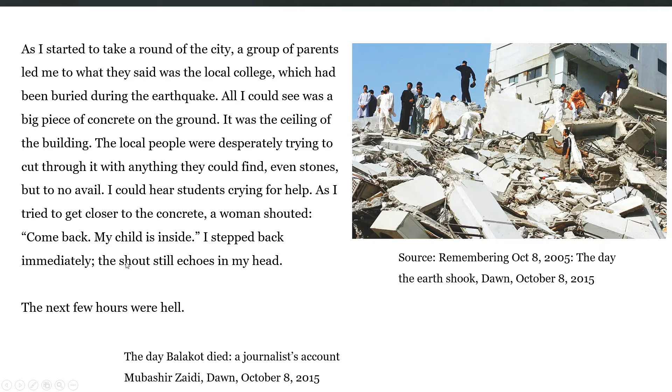So considering this background of this overall scheme, let me show you some of the basic things which we can discuss later, and I'll address them one by one.

This picture is taken from the mainstream media, and this is a typical picture of the Kashmir earthquake damage caused by the 2005 Kashmir earthquake. These are pieces of concrete which the local journalists were mentioning—basically reinforced concrete slabs supported on unreinforced masonry. They just collapsed, and many occupants, kids, and other people were buried under them. We had significant social loss just because of this unfortunate building stock we had at that time.

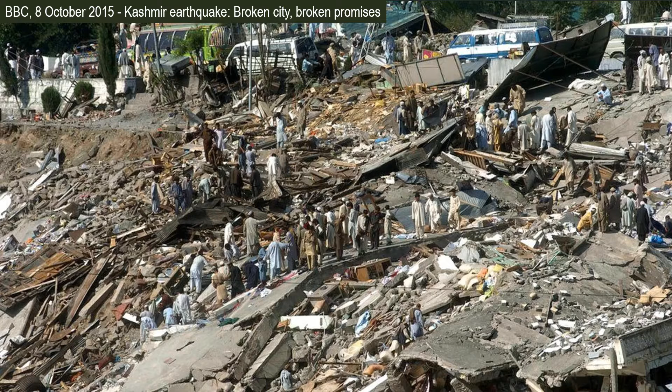I'll discuss the current situation later, but this is what we had at that time. Most of the buildings were unreinforced masonry, and the heavy roof on top of them was the basic reason, along with out-of-plane collapse of masonry infill walls, identified by several reports and research outputs after that. Let's start this whole story with a bigger picture.

I think we are all familiar with this global seismic hazard map, originally developed by GSHAP. Although it is an old version, I wanted to keep it here because it tells us that we unfortunately are one of the countries lying on the boundary of two interacting plates—in fact three in the case of Pakistan: Eurasian, Indian, and Arabian plate. We lie in those areas shown here by the red color, meaning they have a high hazard for future earthquakes.

So you can compare some numbers by looking at these visuals, but I just wanted to give an overview of the level of hazard we have. There are very few countries which have a higher seismic hazard than us. Very few countries. So we are in one of the most seismically vulnerable areas.

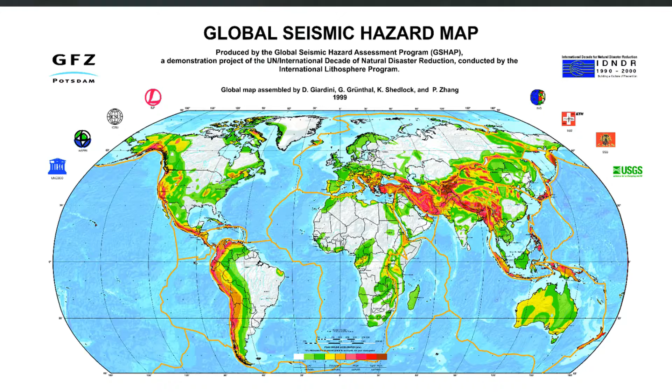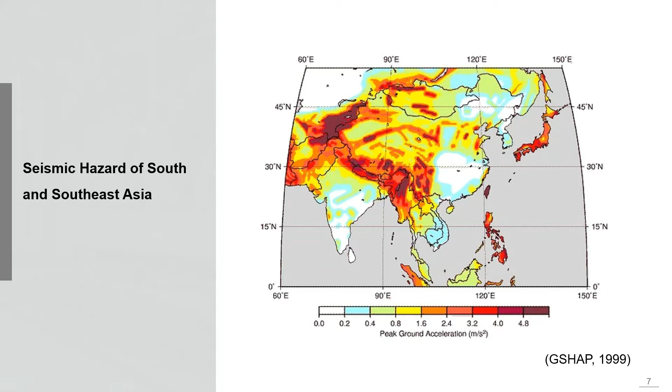Similarly, another map presents the seismic hazard for the whole of Southeast Asia, and we can see the numbers in terms of peak ground acceleration are also visible. So we are in areas which are highly susceptible to future earthquakes. These kind of hazard studies globally give us an indication of where we actually stand in terms of the level and probability of future earthquakes in Pakistan.

Now let's relate that high hazard—I will discuss hazard-related issues later also—but I just want to quickly relate it to the existing building stock in Pakistan. According to a relatively recent study from 2010, the current number may not vary that much: 93% of the existing building stock in Pakistan is unreinforced masonry. They are non-engineered. 93%—it is a huge number. Compared to some other countries, we have the highest percentage of unreinforced masonry.

We have the traditional burnt brick masonry, which is very weak in the out-of-plane direction, and we still keep on using it. Most of our building stock is made from this kind of weak structural system in the out-of-plane direction. So this is something we should focus on directly. All the efforts, all the research outputs, all the policy making should directly focus on unreinforced masonry. This is the very first starting point.

Whatever you are doing in the field of reinforced concrete or in the area of steel structures, for example, they may only be addressing 7-8% of the total building stock. So we have to come up with a national policy or national action plan to improve the seismic safety of this 93% unreinforced masonry.

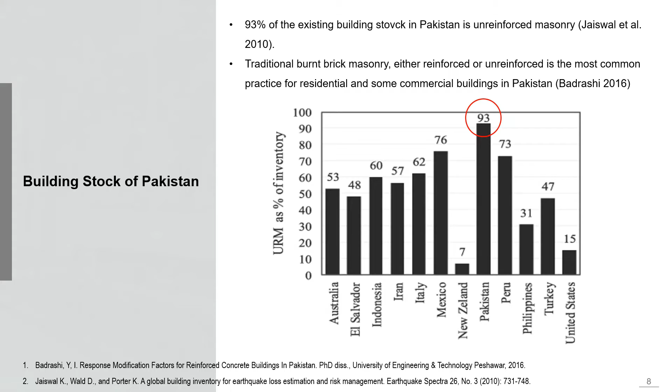We already know that this conventional masonry system used in Pakistan, and used by some other developing countries as well, consists of burnt bricks laid with loose or weak mortar joints, where the out-of-plane stiffness is almost zero and out-of-plane strength is also almost zero. We know this conventional system has several issues. It is the first type of structure which collapses as a result of an earthquake. It is very weak in the out-of-plane direction. It is unable to dissipate seismic energy, and if it is not confined or anchored properly, it may suffer out-of-plane collapse.

It also offers some advantages, but it also has significant disadvantages. We know that it is low cost, and this is the reason why we still keep on using it, even knowing some of the issues related to that. It may provide some better insulation compared to other low-cost systems, but we may develop improved masonry systems, and I will discuss one potential candidate for this.

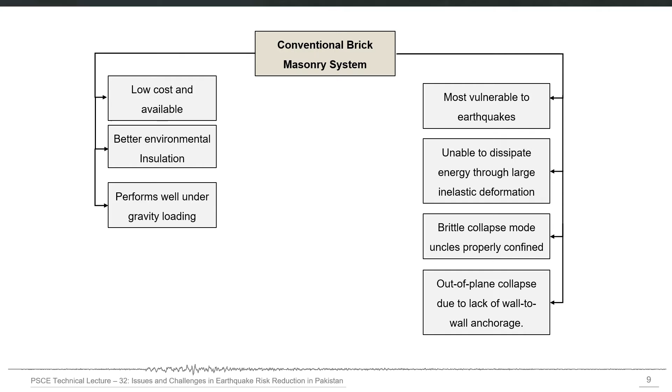It may also perform well under gravity loading, but this is not our concern right now. We will be focusing mainly on lateral loading, and in lateral loading this kind of system is very weak. The burnt bricks are very heavy, and therefore they may cause significant social loss also, apart from the economic loss.

So if we look at the historical pattern of earthquakes and the damage they have caused, we have to rephrase our question. On the left, we have Balakot city after the 2005 Kashmir earthquake, and I keep on using these pictures in all of the presentations and seminars because they give a very clear indication of what actually the condition is.

On the left, we have Balakot after the 2005 Kashmir earthquake, and we can see that the whole city is completely leveled. We can see all those big pieces of concrete, as the local journalist experienced or explained at that time. But basically, they are reinforced concrete slabs which just collapsed because of the collapse of supporting masonry. On the right, we have a close-up picture of one of the collapsed houses.

The person in the yellow or orange, this house is basically his own house, and this picture was taken one month after the Kashmir 2005 earthquake. The message I want to give you here is that once the earthquake occurs, it becomes the permanent part of the lives of those people. So he is just sitting on top of the rubble of his own house, and he is forced to carry out his day-to-day routine and resume his life after the earthquake.

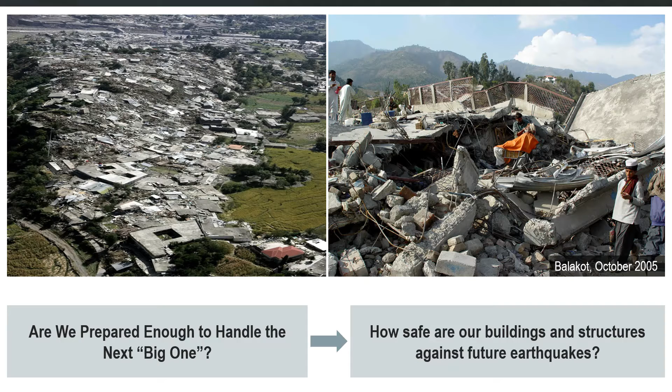So if we have more safe infrastructural facilities, we may develop preparedness and loss mitigation also. Just to give you a recent example, I want to make the point that even a relatively low magnitude earthquake may cause significant damage in our local scenario, considering the quality of construction and other issues in our construction industries.

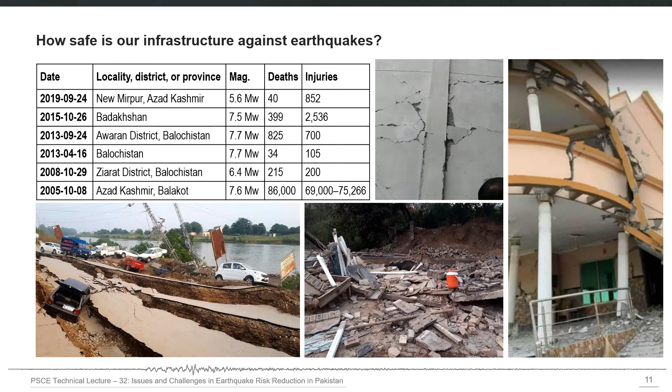So from now onwards, if we talk about earthquake resilience in Pakistan, I will be discussing just four areas, and I will try to cover some of the aspects and issues in these four areas. The first area, which is my own area, is research and academics. Second is about the enforcement mechanism of different building codes, and in fact the development of building codes. The third is the capacity building of current structural engineers and designers in order to equip them for the latest technological advancements occurring around the globe.

And last is very important, and that is about public education and awareness, the role of digital media in actually disseminating some of the information which is required right at the grassroots level.

So let me start with the first area where we may need efforts in achieving seismic resilience or earthquake resilience, and that is research and academics. I can identify two main categories of issues.

One is the accurate characterization of seismic hazard. First, we need to know how much hazard we have in our region, and that will result in a realistic seismic loading which we can apply and design our structures to.

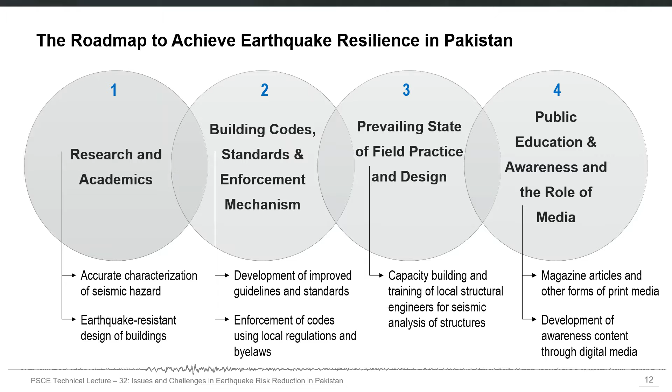The second area is about the earthquake resistant design of buildings and some of the advancements which the world has already made, and we still have to make.

So some of the challenges in research and academics are related to seismic hazard assessment. We know that we can divide the earthquake problem into two broad categories: the structure side and the loading side.

On the structure side, what we know is that we have to construct a linear or nonlinear analysis model, which is a reasonable compromise between a real structure and its mathematical representation.

On the loading side, we have to come up with some characterization of seismic loading, seismic ground motions. Either in the form of time history, acceleration time history, or in the form of a design spectrum. Since it is currently not possible to predict a future earthquake, we have a probabilistic science behind that.

This gives us an approximate characterization of future ground shaking. It contains a detailed process of seismic hazard assessment, and then the site response analysis in order to quantify the amplification effect of different local soils.

Considering this overall story, I can identify issues in four areas: accurate characterization of seismic hazard, site soil characteristics, structural modeling in the local context, and lastly, seismic analysis and earthquake resistant design, including evaluation of existing buildings and design of new buildings.

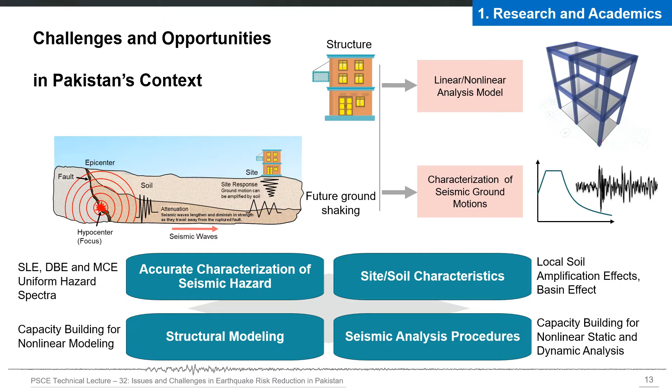In the first area, accurate characterization of seismic hazard, the very first issue is a reliable, complete, and comprehensive earthquake catalog for Pakistan. Several attempts have been made, and one comprehensive attempt is still being made.

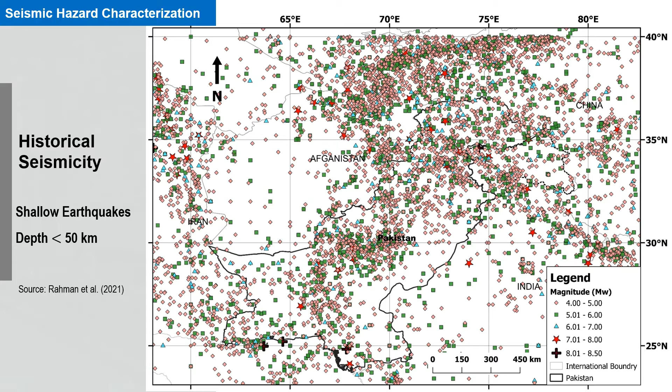We can see that most of the shallow earthquakes are spread along the main plate boundary, dividing the country into two halves. Some shallow earthquakes are also concentrated in the northern Hindu Kush region. If we talk about deep earthquakes, they are mostly concentrated in the Hindu Kush region.

We have often heard news from the media about large magnitude earthquakes greater than 7 or 6.5, which may affect the seismic hazard within the administrative boundary of Pakistan. You can see some star symbols here on the northern side in the Hindu Kush region, and they are all earthquakes with magnitude greater than 7.

Even some very deep earthquakes having magnitude greater than 8 were experienced in the last 100 years. So the very first issue is to come up with a complete and reliable earthquake catalog which can be used as a basis for future seismic hazard assessments.

Hazard assessment is an approximate science, and therefore we need to update it after every few years as more data becomes available, and as new methodologies and analysis procedures are available. So we must have a reliable seismic source characterization model for Pakistan.

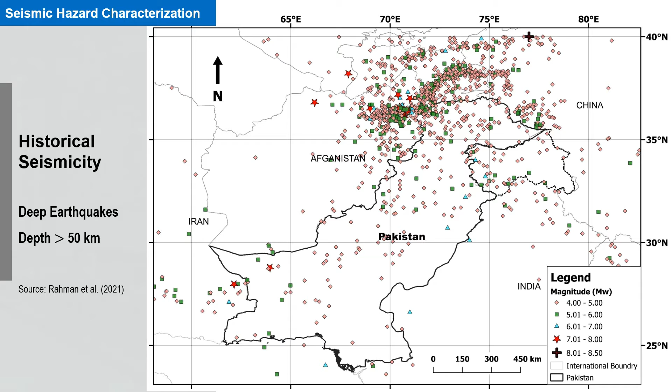A unified attempt is being made, and this study is also part of that attempt. The second issue I can highlight is the crustal fault database, or the crustal fault seismic source model for Pakistan. Currently, we don't have a unified study or database for all the crustal faults of Pakistan. Many of the crustal faults are unnamed.

Some of the data is available in terms of slip rates and basic geometry of those faults, but most of them, their slip rates are not available, and there may be several of them which are not even identified or discovered yet.

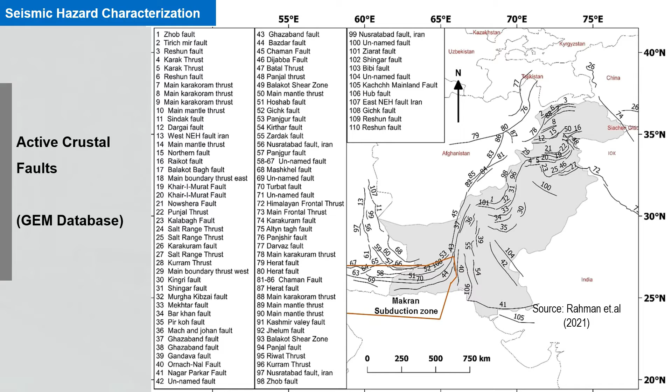Currently we are working with the Geological Survey of Pakistan and Pakistan Meteorological Department to come up with a more accurate and reliable fault source characterization model that will be used as a basis for a better seismic hazard assessment in future.

Another issue which I can identify in the seismic hazard of Pakistan, and some of the attempts made in this area, is the development of risk targeted ground motions.

From 2009 onwards, the International Building Code and American Society of Civil Engineers 7-10 document moved on to a new definition of seismic hazard: once you have the MCE level ground motions, you have to modify them based on the risk coefficient at each pixel, and modify the whole study area, finally coming up with a map based on a target risk.

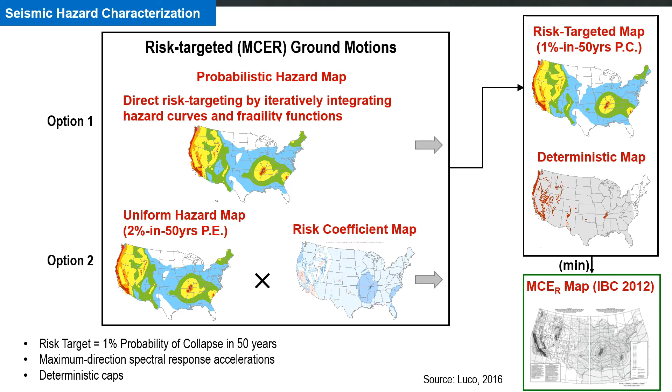So this is something which we should consider in future, and this is something which should be our next target: to develop a risk targeted ground motion dataset for Pakistan.

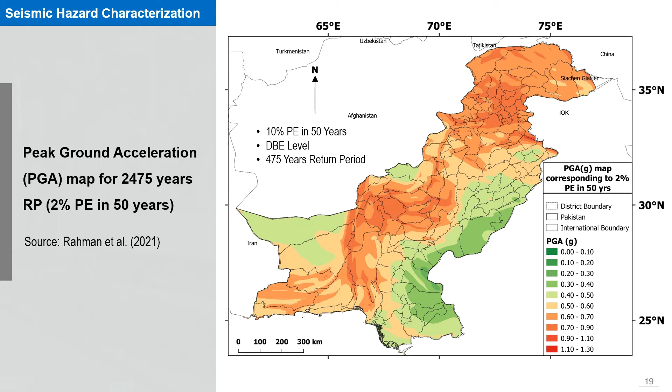But as I have mentioned earlier, even the global earthquake model database still misses some of the important faults which should be considered, mostly on the northeast side. So therefore, there is still room for improvement, and we will keep on improving our seismic source database, and finally keep on improving the hazard calculations.

This is the spectral acceleration maps for different return periods. On the left hand side, we have the short period spectral acceleration, also known as SS, for the DBE level, design basis earthquake. On the right hand side, we have the MCE level. And the numbers correspond to the hazard, which is higher than what we had in the 2007 building code of Pakistan.

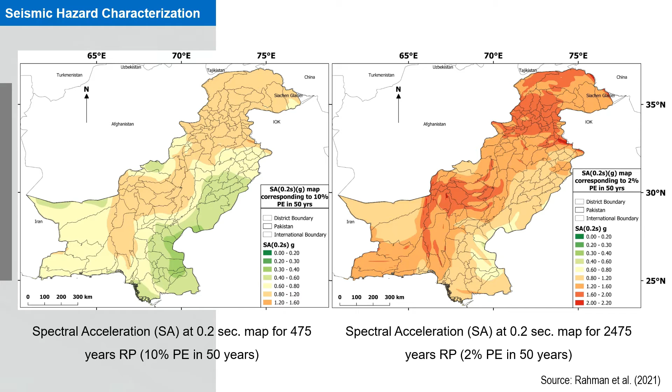But the effort is still going on, and we are currently improving that source model to have a very clear picture of the seismic hazard.

Another related area I want to highlight is the seismic monitoring network, the current status in Pakistan. I'll give you an example, comparing Pakistan with another country. The reason I've taken Taiwan is that it's a very small country with an area of 36,000 square kilometers, compared to Pakistan's 881,000. The whole population of Taiwan may be less than one megacity like Karachi in Pakistan.

The reason I've compared both these countries is that their design hazard level in terms of peak ground acceleration is very close. The maximum hazard, as indicated by the national seismic hazard maps for Pakistan - the current one, unless we replace it this year, but if we talk about the 2007 one - is 0.32 G, the maximum PGA, classified following the UBC methodology as zone 4. In Taiwan, we have 0.35 G.

But all these dots on both maps, the triangular dots, show the seismic stations. On the left, we have the seismic station network by the Pakistan Meteorological Department. On the right, we have the same thing in Taiwan. You can clearly see, if you compare the scale, you can't even count those red dots - each one is a seismic monitoring station. But on the left, we can count - although having a great area and a huge population, we may have maybe 20 to 30 maximum.

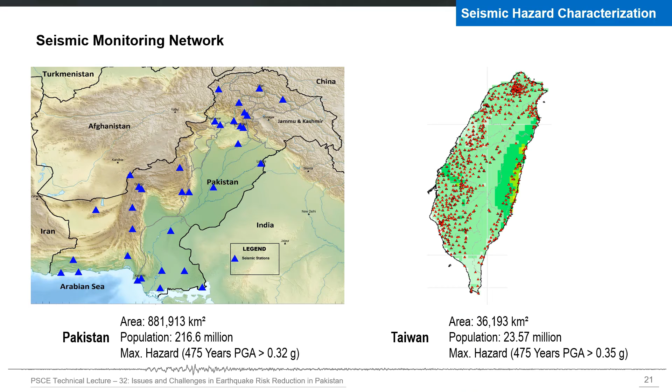Similarly, another area in the same overall theme is the liquefaction potential of some of the sites in Pakistan. And if not liquefaction potential, then maybe the amplification offered by some sites due to local soil conditions. In this particular example, I show some of the areas, especially in the Sindh region, the coastal belt. There may be several sites which are susceptible to liquefaction.

Also, some recent studies have shown that even soil classes which are considered good, like soil class D, may offer an amplification of more than 2 times when you compare the bedrock level hazard with the surface level hazard. So several site response analysis results are indicating that we may have a high level of amplification for some of the local soils.

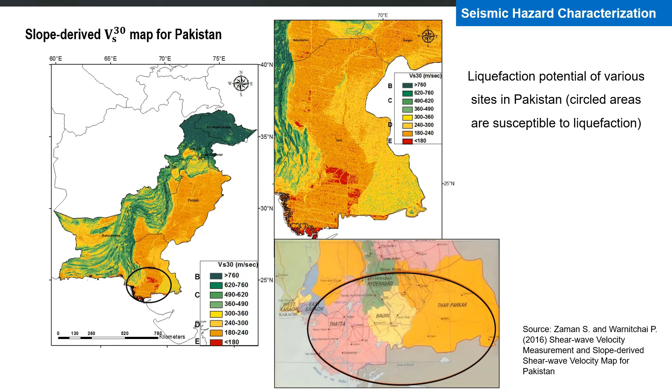Now let's move on to the second side of the whole story, and that is the structural side. I'll be discussing some of the issues in structural modeling and seismic analysis of structures in Pakistan. We know the evolution of seismic design approaches started when we shifted from intuitive design to code-based design, and then there was a whole era of different code-based procedures and prescriptive design provisions.

But then in the late 90s, we know that performance-based design emerged, and now it's fully developed into a state-of-the-art new seismic design philosophy. Currently, it's being widely adopted in some developed countries, but the world has moved on and also developed several other new seismic design philosophies, including consequence and risk-based design, and finally resilience-based design.

Because in these latest two approaches, you actually do not consider the structure as just one unit. You have to consider it as part of a complete ecosystem of buildings and their environmental implications, and the building should actually contribute to the overall energy content, environment, and carbon footprint also. So all of these latest concepts are now being integrated into structural design.

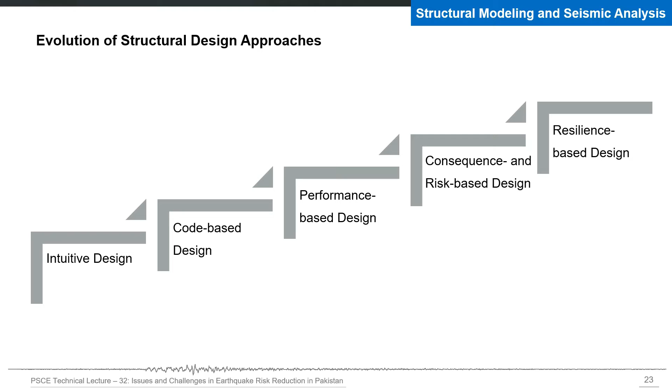Our current status is that most of our engineering practice still revolves around code-based design, and that too is mostly around UBC 97. But the world has moved on to the latest seismic design philosophies, and for important structures and buildings, performance-based design is the default approach for some of the innovative shapes and structural systems. Currently, we are also lacking in this area on the structural side.

Let me give you an example of what you can get if you develop or bring that technology into Pakistan. When you perform nonlinear or inelastic analysis of your building structures, you can explicitly answer some of the questions clients ask. For example: how safe is my building? How much damage can I expect at this level of future earthquake? All these questions can now be explicitly answered.

Unfortunately, our current design practice is such that we still want to hide behind traditional building codes and do not want to explicitly answer these questions asked by clients or other stakeholders. All we can say currently is that we have followed such and such code.

But the latest performance-based design philosophies and other approaches set you free to actually answer these questions and evaluate the performance of the building as it is designed and built. For example, here you are seeing a 44-story example building which we have done.

The nonlinear dynamic analysis of that building helped us identify the actual level of damage at a particular hazard level. We can even identify those columns, beams, or shear wall elements which will have certain cracking, yielding, or other damage. The model itself can be shown to a client, who will then be able to understand the level of damage.

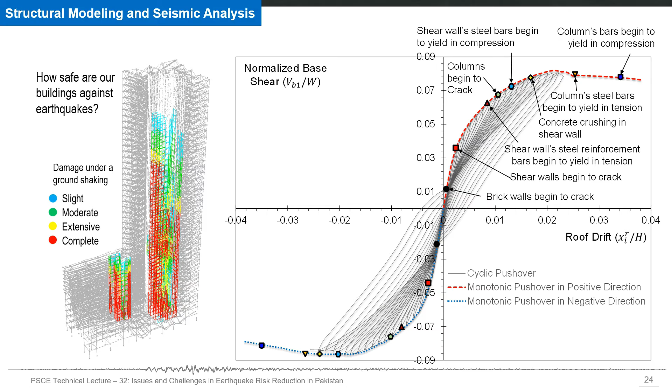Then the real structural damage starts afterwards—for example, shear wall cracking or column yielding in steel. So masonry has several issues, and those are identified in this analysis. You will be able to identify all those issues if you just embrace the fruits of these latest technological advancements.

Another issue is that, for some reason, we are reluctant to perform dynamic analysis of our buildings. By dynamic analysis, I don't mean response spectrum analysis—I mean real time-history analysis.

Maybe the reason is that time-history analysis requires the selection of representative ground motions, which requires understanding the seismicity of your area so you can select suitable ground motions. This issue we have also tried to address, and I will show you some of the efforts made at NUST.

But this is very important. Currently, there has been a global effort or movement to convert the current default design practice to linear time history analysis instead of the equivalent static procedure or response spectrum analysis procedure, because this may have significant cost implications.

You may bring economy if you perform dynamic analysis for structural design, because when the building is actually shaken, the forces will be allowed to interact, different elements will interact in a dynamic manner, and therefore the estimate of design forces at the end will be more realistic, and in some cases less than what is predicted by traditional seismic analysis procedures. We know that the modal combination rule in response spectrum analysis is very conservative, so that may be addressed if you perform real dynamic analysis.

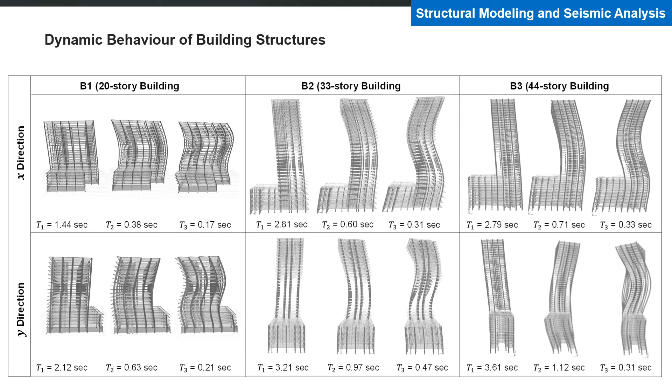So these were a few regular kinds of buildings with setback effects, but we have also tried some buildings with irregular shapes and geometries, both in plan and in the vertical direction. These are some example buildings which we have done recently, and you can see they have significant features of vertical and horizontal irregularities.

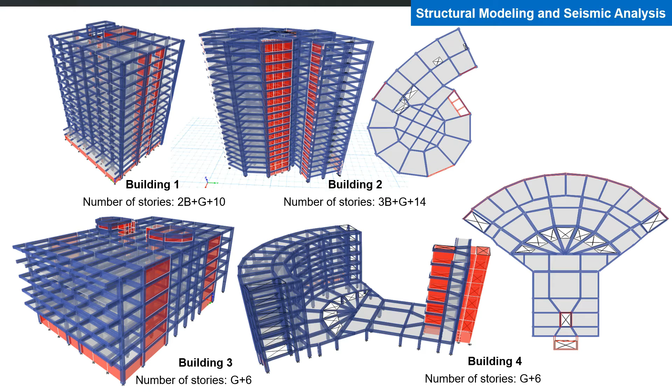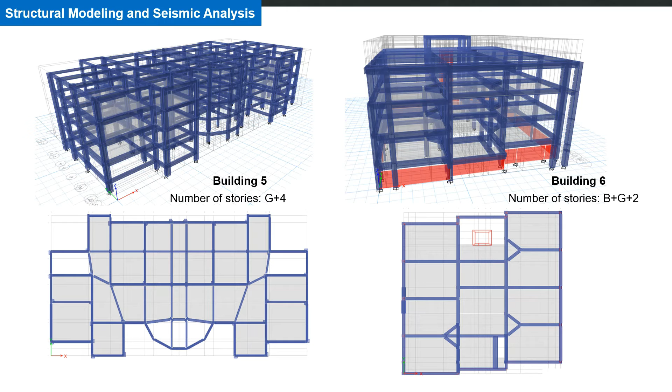This is also one area we should focus on: for structural evaluation, or for testing an idea, we should take real buildings either as they are designed or as they are built, so that the numbers are physically meaningful and related to some real structure. So we have taken buildings with real geometries, plan and vertical irregularities, some with inclined beams, some with irregular shapes of columns, etc.

This study I want to highlight specifically shows one issue we may consider: multiple or repeated earthquakes, meaning a building in its design life may experience more than one earthquake. It may get damaged or enter a nonlinear, inelastic range as a result of one earthquake, and then may not perform well under the second earthquake as desired by the designer, because of the initial damage accumulated from the first earthquake.

Specifically in areas like northern Pakistan, where we may have large magnitude earthquakes from the Hindu Kush region, there may also be aftershocks and foreshocks. So buildings may experience more than one earthquake in their design life.

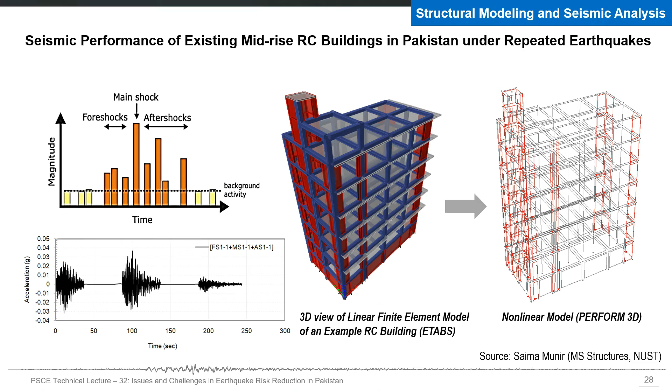So, to investigate whether this effect should be considered at the design level, we took some example buildings and converted their real design into nonlinear models, using the actual amount of reinforcement provided by the designer and the actual geometry and cross-section sizes. We subjected these nonlinear models to a sequence of foreshock, main shock, and aftershock, and then compared the results with the main shock only, which is what is normally considered for structural design.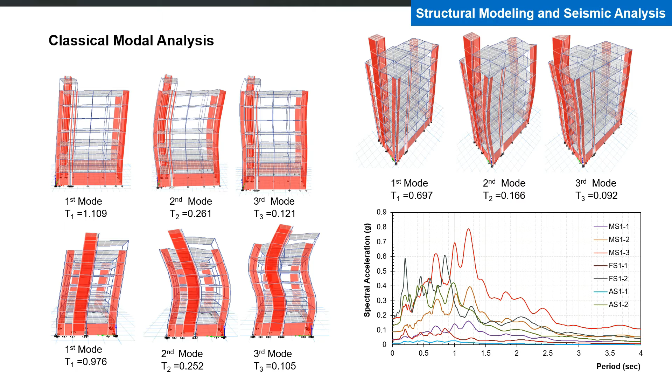We considered several levels of foreshocks and aftershocks, as indicated by the spectrum on the bottom right, and developed different sequences of ground motion. What we observed is that when the whole sequence of foreshock, main shock and aftershock is applied, we expect more energy dissipation, or a higher level of non-linearity in the computer model, compared to if we only apply the main shock. So the actual energy dissipated by the structure in case of the sequence was more than what was dissipated in the main shock alone.

We can convert that dissipated energy into the level of nonlinearity experienced by different structural elements in the structure. So we were able to observe that the number of elements experiencing inelasticity, yielding or cracking, was greater in the case of the sequence of foreshock, main shock and aftershock, compared to having only the main shock. This allowed us to identify those problematic beams or columns which were actually damaged as a result of the whole sequence, but were still safe if only the main shock was applied.

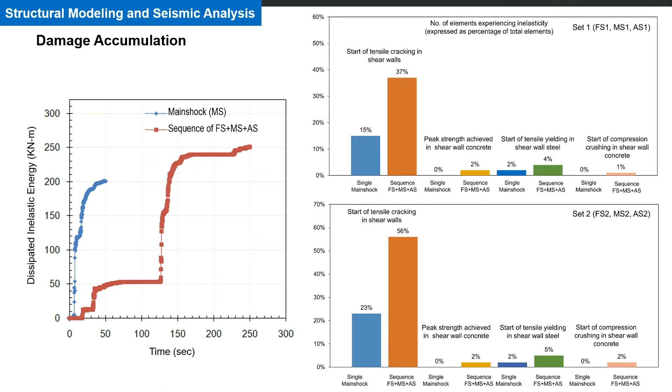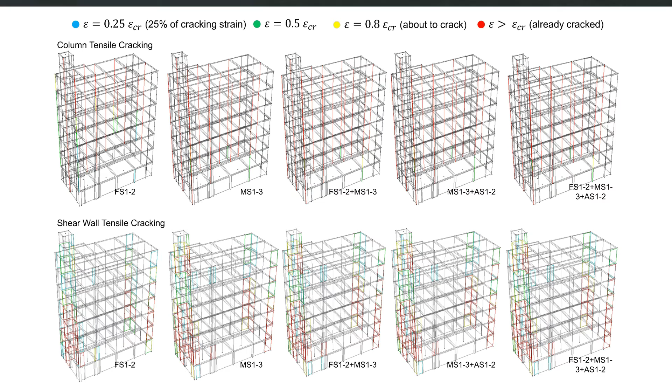Similarly, another area we are rigorously working on nowadays is performance-based seismic design. Recently, we worked on a building located in Karachi, a 48-story building, where we were able to identify the level of structural damage in all columns, shear walls and beams, and clearly see the progression of damage as the building is stressed from zero to a certain level of lateral loading.

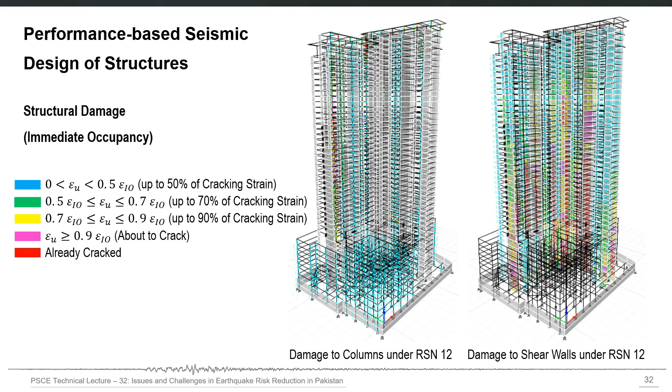These are some examples that help illustrate the implications of all this information generated through these latest tools and technologies. It will be tremendous, especially in a country like Pakistan, where current building practice still mostly follows the traditional code-based approach.

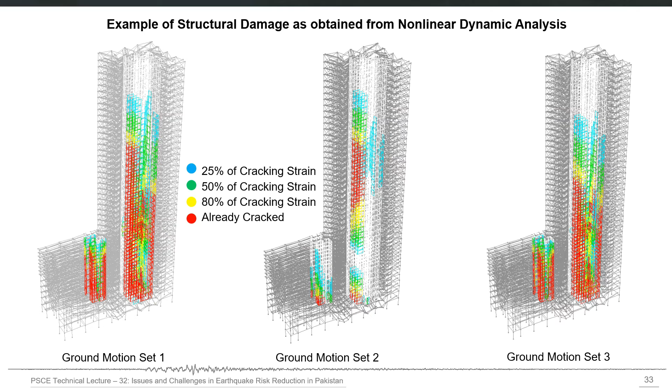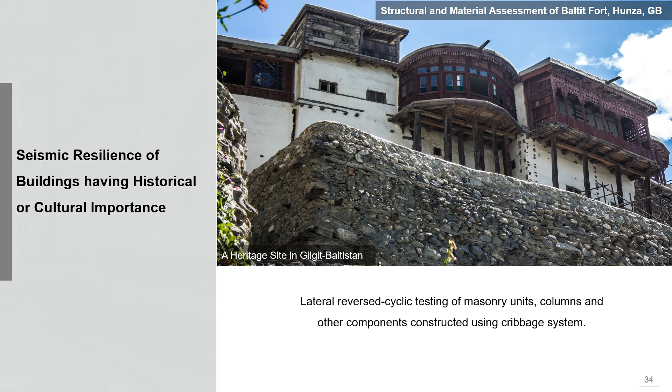Another area I want to highlight on the structural side is the seismic resilience of buildings with historical or cultural importance. As Tahir Saab mentioned in my introduction, I was involved in the structural and material assessment of the Baltit Fort, located in Gilgit-Baltistan in Hunza. As part of that investigation, we tried to understand the seismic performance of the cribbage system, which is a very common structural system in that part of Pakistan.

We carried out some field testing, then brought back the information and materials, and constructed wallets of the cribbage system, subjecting them to lateral cyclic loading in order to understand the level of energy dissipation offered by this system.

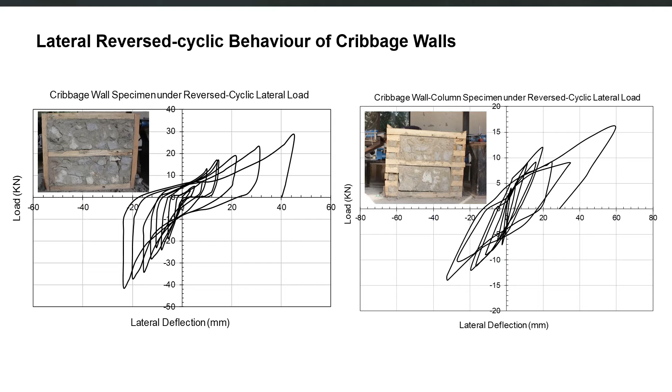Our conclusion was that this system, if confined properly, can significantly influence the overall energy dissipation of the structure itself. But one issue we found in this particular structural system was local failure. Under severe shaking, a certain local failure can occur, as shown in the figure on the right, which may result in brittle failure. So special emphasis should be given to the confinement of stone masonry in the wooden scheme, which is proposed as part of the improved structural system in this investigation.

Another issue we urgently need to address is the structural modeling of unreinforced masonry buildings. As I indicated at the start, more than 90% of the existing building stock in Pakistan is non-engineered. We cannot just ignore them—they are there, and people are living in them. Therefore, we need to do something about assessing the seismic performance of such systems. The very first step on the structural side would be to actually model them, subject them to ground shaking and lateral loading, and see how they perform.

This is an area that no one is really working on—the modeling of unreinforced masonry buildings. The idea is to first understand the different failure mechanisms offered by our local masonry, then try to simulate them in software packages based on finite element analysis, and these should be mainstream programs. We know we can perform micro modeling of these walls or buildings with unreinforced masonry, but common design practice may not be able to follow those specialized modeling techniques used in academia. So what we need is for research findings to be converted into simple modeling guidelines that a common designer can use in mainstream commercial programs in order to include the effect of, for example, masonry infill, or to model unreinforced masonry.

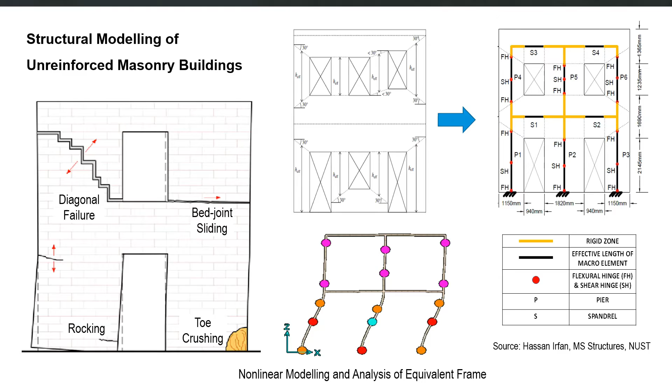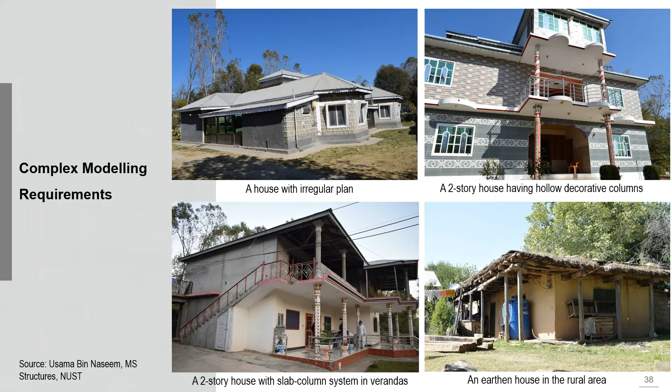So we have very complex modeling requirements for each structure—for example, earthen houses or adobe structures will have very complex modeling requirements. But we are trying to develop a solution first for simple buildings, and then we can extend it to complex structures also. But we cannot ignore them, as I said—we may not just focus on other structural systems. This is the first candidate which requires our attention if we want to develop a simplified modeling solution.

So one promising solution which can be used as a replacement of conventional masonry system is what we call interlocking compressed earth block masonry, or earth bricks masonry. Conventional masonry provides a low level of ductility, fails in a brittle manner, and has very weak out-of-plane strength if it is not properly anchored.

There is another kind of block recently developed around the globe and currently being used. In Pakistan also some organizations have started making it - the interlocking compressed earth block. First, it is compressed, not a burnt brick. Second, it has shear keys so it interlocks with other elements, and therefore doesn't require significant mortar or adhesive in the bed joints.

One more thing is that we can also add reinforcement to this structural system, not just in one direction but in both vertical and horizontal directions. This system has the facility to introduce reinforcement bars, and once we have lateral bars also, we can anchor different walls in perpendicular directions and develop an integrated or unified coupled wall action - in fact, a very improved version of confined masonry.

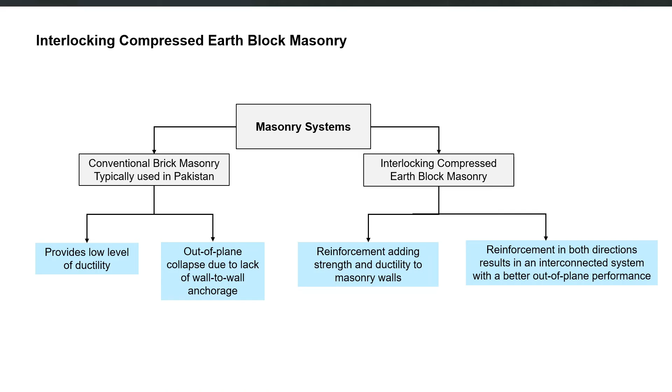In different parts of the world this solution is being adopted, and they have modified the shape, size, and other features of the interlocking compressed earth blocks according to their local environment and construction practice. But there are some common features - for example, all of these bricks have holes through which the vertical rebars can pass. Some also have horizontal holes or grooves at the base for lateral bars. Some have one hole, some have two holes, and their sizes are also different.

What we are currently doing at NUST is trying to optimize its shape according to our local scenario, and we are also trying to optimize its composition. Finally we will come up with a solution which we can give to industry. The main benefit of doing all that is that we will have complete research and development behind that product.

Currently what our local organizations are doing is just adopting some shape or composition from international practice and replicating it in Pakistan, but they don't have any R&D behind it - whether that shape, size, or composition is optimized or not. That R&D is required not only at the material level but also at the full structural level.

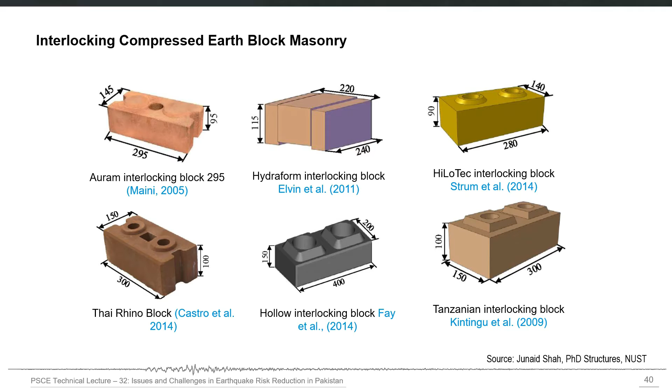So what we are doing is developing our own technology in this. Not only are we optimizing the shape and composition, but also looking at masonry as a whole structural system, because we want to introduce that solution to the industry with all its research and development, as a full structural system.

So we are trying to develop the mechanical properties - first estimating them at the material level and then at the full structural level - and then we want to try some simplified modeling approaches also for the analysis of such buildings which we are going to propose.

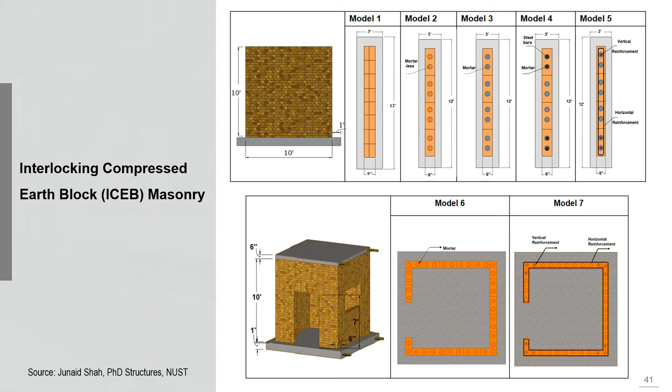So the full research and development is in progress, not only at the material level but at the individual wall level and at the full-scale structural level also, with static and dynamic analysis of these kinds of structures. Soon we will be able to introduce this comprehensive solution to industry.

Then another issue which I will quickly discuss, although not related to buildings, but related to essential infrastructural facilities - for example dams, for example power plants. This example is from Guddu power plant, where we actually carried out the structural health assessment of a damaged foundation of a steam turbine.

We performed the vibration-based structural assessment. Apart from all the non-destructive testing, I would like to focus more on the vibration-based health assessment.

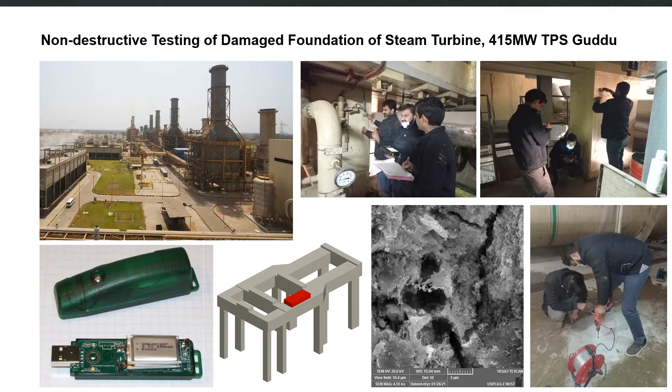We actually shook that whole structure using an eccentric mass vibrator, calculated its natural mode shapes and time periods, and used them to construct a computer model which can be used for the design of retrofit of that building. This is just one view of the mode shapes which we were able to identify as part of the free and forced vibration response of that damaged structure.

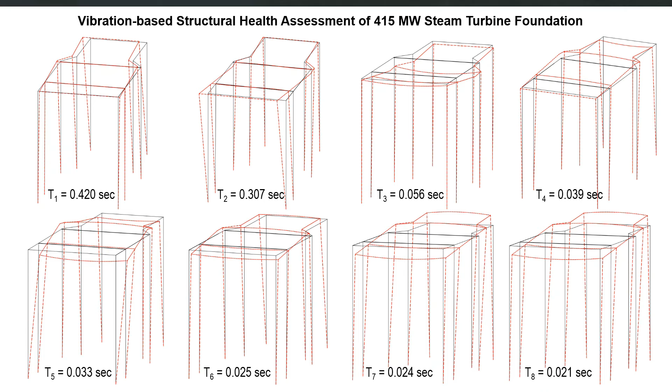Similarly, the second example in this area of essential facilities is from the Gulpur hydropower project. I want to especially emphasize the importance of site-specific probabilistic seismic hazard assessment. In developed countries, important structures like high-rise buildings and dams require this, and it is sometimes required as part of performance-based seismic design. Currently, we are for some reason reluctant to actually perform site-specific hazard assessment and still rely on code prescriptions or values for seismic hazard, even for very important structures.

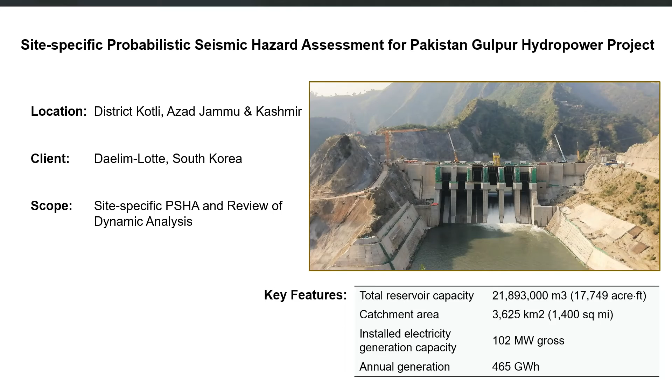In this example, we carried out the hazard assessment for the site of the Gulpur hydropower project and developed seismic hazard maps for that particular project site. We considered all the faults lying in the vicinity of the project site, taking a 200-kilometer buffer from the project site and considering the contribution of each fault at that location. Similarly, we performed site-specific hazard assessment for some of the building sites constructed as part of the New Pakistan project.

This trend should be encouraged, to perform site-specific hazard assessment. In the new building code, we are specially emphasizing this idea that although the PSHA for the whole country is performed and the results are presented, they are for general use only. For special buildings, designers are encouraged to carry out site-specific hazard assessment.

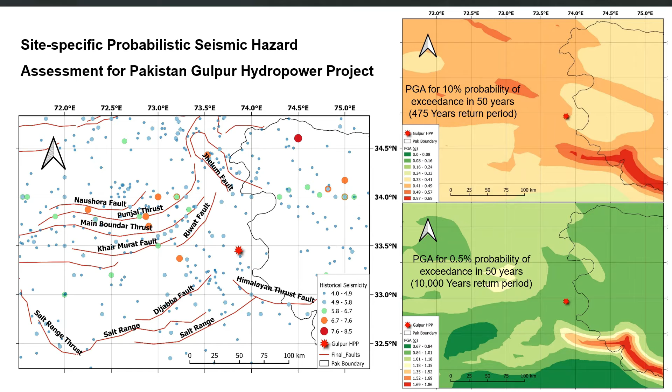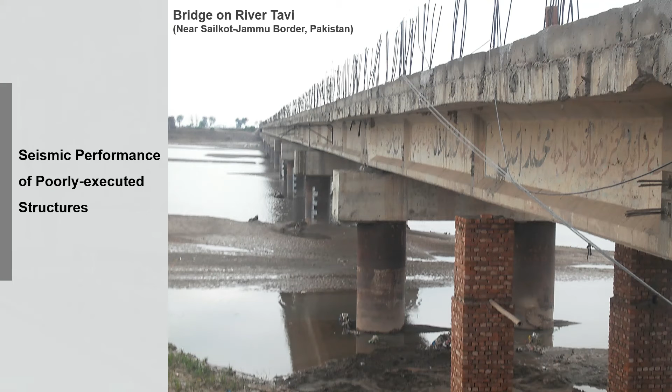Another issue I want to highlight here is poorly executed structures, their analysis and their modeling. Unfortunately, we may have several such structures which were not executed properly and may have quality control issues. This example is from a bridge which we actually tested and analyzed. It was located in Sialkot, and it was a bridge with very high strategic importance because it was located very close to the border.

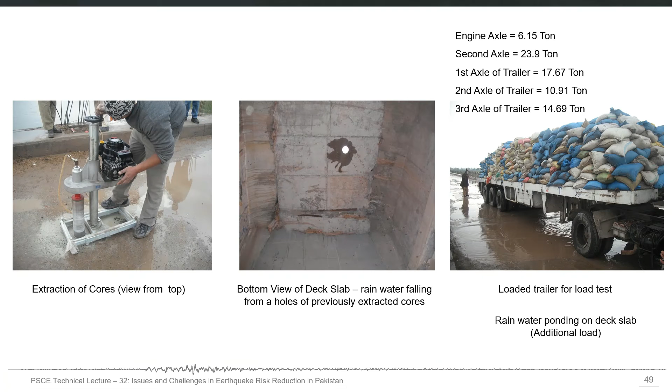It was the only link between the rest of the country and some villages located within the administrative boundary of Pakistan at that location. So we may have structures with workmanship issues, alignment issues, or finishing issues. There may be issues of several types, for example exposed rebars, or exposed post-tension rebars, and there may be significant losses in the post tensioning. We carried out that evaluation and conducted the load test also for this example bridge, and we were able to identify some issues not only from the experimental evaluation but also from the modeling.

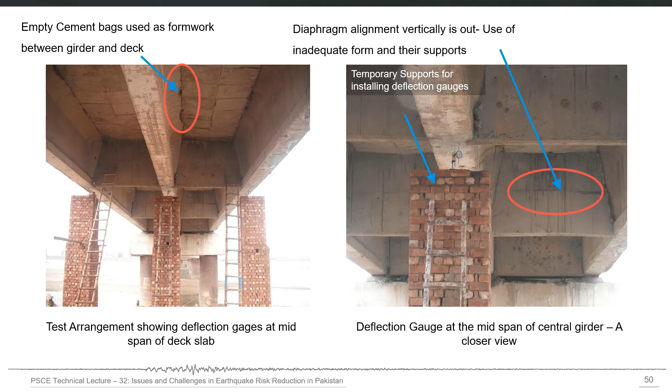These are some views of those load tests which we conducted for that bridge. After the analysis, we identified that the existing factor of safety for that bridge under ultimate loads was just greater than 1. So the existing capacity was just exceeding the demand expected under high levels of live load or traffic load. We proposed several measures to rehabilitate, and we carried out the influence line analysis and identified some solution methods which we provided for that particular bridge.

One last issue in this research and academics discussion I want to highlight is that all of our efforts will be of little use if we fail to translate or convert our research findings into actions. In order to understand why some people take precautionary measures and others do not, while having the same level of seismic risk or exposure to the same level of hazard, we carried out an empirical study from Rawalakot, trying to quantify the level of risk perception, how people think about the level of risk they are subjected to. Our basic hypothesis was that the level of preparedness for a particular household will be related to the level of seismic risk which it is perceiving.

As a result of this study, we found out that this hypothesis was correct. People who think they are more at risk are more easily willing to take some preparedness measure compared to the ones who don't think they are at risk.

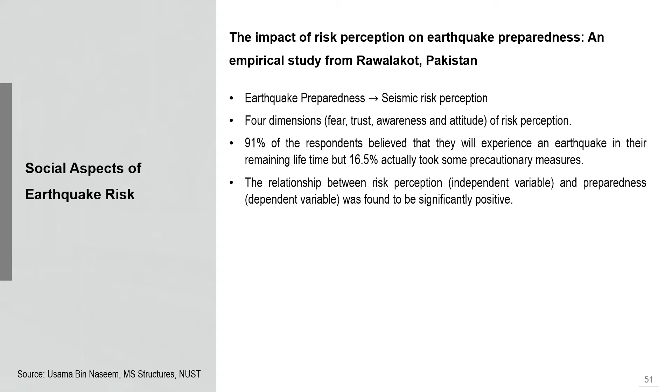So understanding the social aspects of earthquake risk is also important. We will not be able to translate our research findings into actions if we fail to understand the social implications of this earthquake risk. So this is also something which requires attention in our local Pakistani context.

Now let me quickly discuss the development of building codes and standards and their enforcement. Currently, you might have already heard that the Pakistan Engineering Council is in the process of formulating the updated Building Code of Pakistan, and it will not be only seismic provisions—it will be a comprehensive BCP 2021.

Some of the key challenges we are facing include, first, the development of national seismic hazard maps. We know already that the seismic design philosophy has shifted from PGA based zones to spectral acceleration based distributed seismicity. So we need to develop seismic hazard maps according to these new parameters and new information, some of which I have already discussed in the first part of my presentation.

Then the other major aspect would be the capacity building of structural engineers to use modern tools. Since we will be converting from the zone-based UBC 97 method to the spectral acceleration based IBC method, we may need to perform some capacity building training programs or events such that practicing engineers are familiarized and comfortable with the use of this new SS and S1 based method.

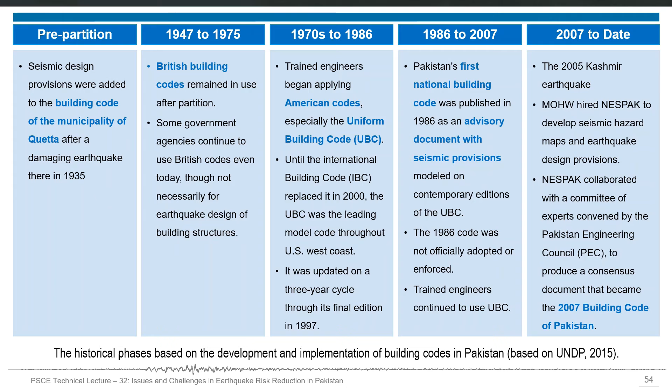The very first is the risk targeted seismic hazard maps. Currently, because of the unavailability of fragility data and the unavailability of an accurate fault model, we may not be able to actually develop risk targeted seismic hazard maps. But this is something which we should do in the near future.

Similarly, the design wind speed according to the new ASCE 7-16 definition should be a 3-second gust wind speed recorded at a particular height, 10 meters. Currently, the Pakistan Meteorological Department has several wind speed recording stations, but they are not actually meant for this specific definition: 10-meter height, 3-second gust, and also the maximum design speed should be based on 15% probability of exceedance in 50 years, which corresponds to a mean recurrence interval of 300 years. So we must have a huge data set recorded at a standard definition in order to develop the basic design wind speed maps. This is a real challenge for us.

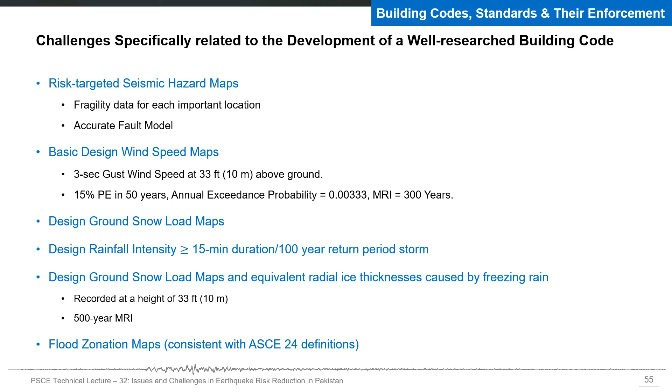Another aspect is capacity building and training. Currently, once we formulate that code and finish that document, we will start a comprehensive seminar series or workshops for introducing that code to our current structural designers, basically getting them familiarized with some of the latest design approaches or provisions as indicated in the latest IBC versions of building code. So this is also one area which we may need to focus more on.

Some of the efforts which we have recently done at NUST related to this area is that we have started this website where we actually post our training material or learning content which practicing engineers may follow, and therefore they may be familiarized with some of the latest tools available in research, but which are not that much welcomed in the construction industry and local practice. So we want to provide all those training materials and simplified modeling guidelines and solutions which we have developed, in a simple manner, to our field engineers where they can try them, and there we can collectively bridge that gap which currently exists in Pakistan.

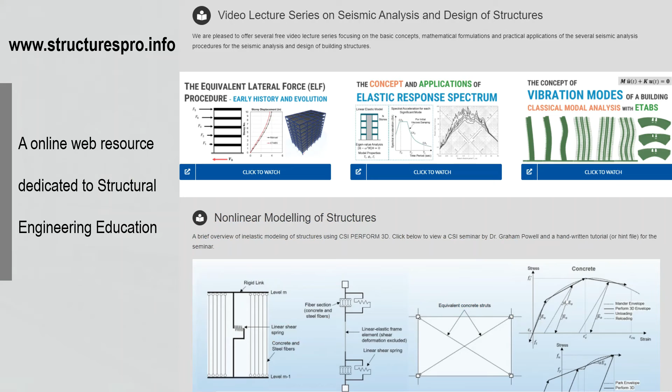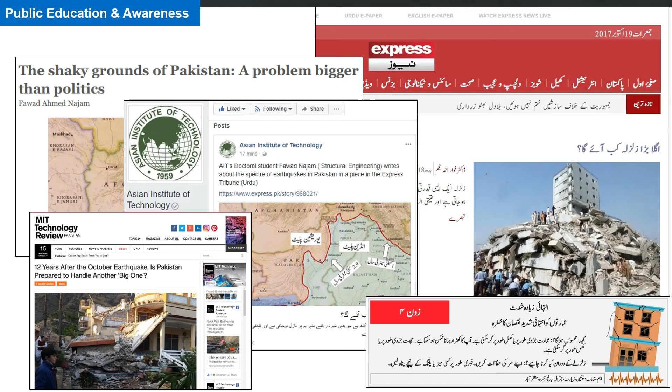The last point which I want to highlight here is public education and awareness. As I have said earlier, all of our efforts will be of little use, and in some cases of no use at all, if we fail to convert them or transfer them at the grassroots level. And one of the most effective tools is local media for public education and awareness.

So all of those who are related to seismic resilience, safety and vulnerability should keep using that medium to sensitize people that the buildings they may be living in may not perform well in a future earthquake. They may have significant deficiencies which need to be addressed. Structural designers may need to focus more on the use of latest tools, improve their understanding of structural behavior, and rely less on just software outputs to come up with safer designs. All of these efforts are to finally come up with a comprehensive, integrated action plan for seismic resilience of Pakistan.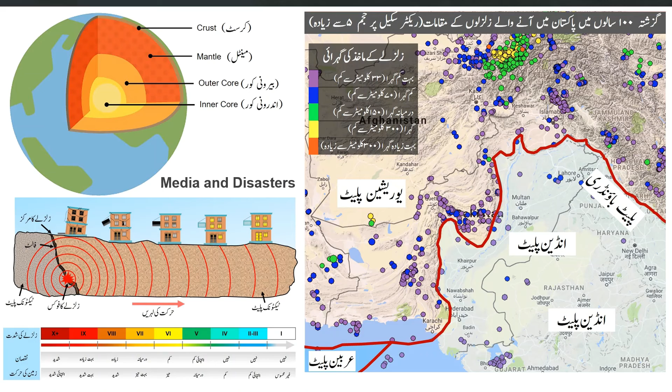One of my students is working on developing simplified infographics to make people understand, or maybe we can include them in the curriculum for our kids, to help them understand the science of earthquakes, why they occur, what they should actually do when they feel shaking or experience an earthquake, and what is the first action they should perform. All of this information is now converted into easy to understand local language so that laymen or our next generation can be trained to understand the science and know what they should do once they experience an earthquake.

So finally, I will close my talk on this point: all of these efforts should not be considered in their own single aspect. Actually, all of the efforts should be integrated. Obviously the role of a well-researched building code is far more than, for example, the role of an individual designer or organization. But still, the academia in terms of research and development, the role of civil society, the role of practicing engineers, and similarly the role of government organizations and disaster preparedness authorities may not be undermined. Therefore they all need an integrated effort if we want to achieve earthquake resilience in Pakistan. With this message, I will end my talk here, and if there are any questions we can discuss now.

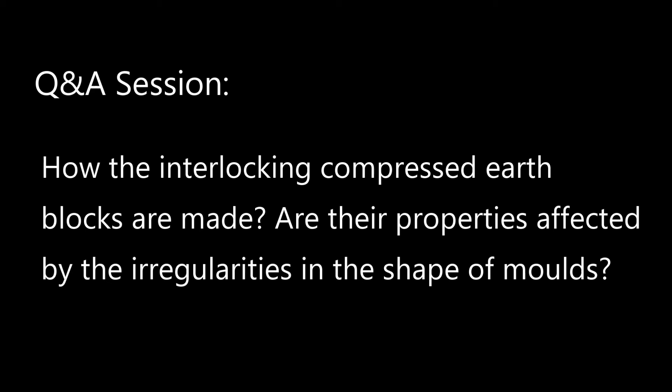Before answering this question, one quick comment: one common misconception is that seismic hazard is increasing with time. This is very wrong, and unfortunately I see many learned people also having this idea. Actually, what is increasing is seismic risk, because our vulnerability is increasing. So overall seismic risk is increasing, but the phenomena itself is not increasing.

There are no more earthquakes now compared to previous years, whether 100 years or 50 years. The number of earthquakes for a particular magnitude is almost constant if you take a particular slice of time. A phenomena which spans hundreds and thousands of years should not speed up in our narrow slice of time, so it is constant over thousands of years.

What is increasing is our own vulnerability because of the poor quality of construction which we are having, and we keep on having it, and therefore the overall seismic risk is increased. Now we are able to record more earthquakes compared to past years, and this also is a reason for this misconception. We are recording more compared to the past, but the total number of earthquakes at a particular time remains constant on average.

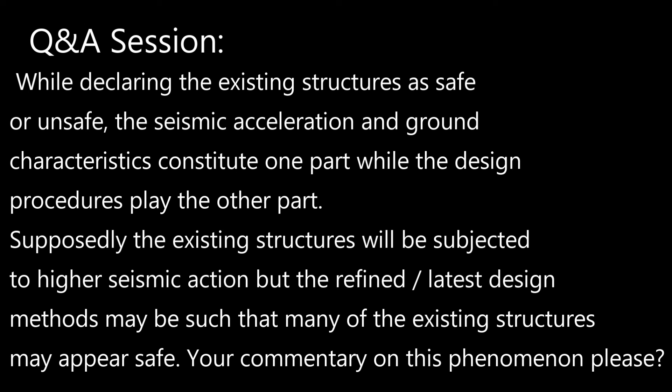Right, so this is something especially being considered by the code committee in recent times, because since we are having a significant change from the old UBC method to the new IBC method, we may need to be very careful about its implications also. So the Hazard Assessment Committee and the subcommittee for design load calculations, and several other subcommittees, are combinedly working on this aspect. Currently, I may not be able to answer directly whether there will be certain buildings which may require retrofit according to the new code and which may be declared unsafe.

Currently, I may not be able to comment on that because it depends on the final level of hazard and also some other design implications which will result from shifting from UBC to IBC. Because, for example, the concept of seismic design categories in IBC building codes enforces

different detailing requirements and the use of different structural systems compared to the zones in UBC 97. So each structure now will be assigned a seismic design category according to the SS and S1 values and according to the risk category associated with that structure. That seismic design category will have certain implications on the use of structural systems and some detailing requirements and other design provisions. So currently this is something being considered, but I am not in a position to answer directly whether there will be certain buildings which may require retrofit or not.